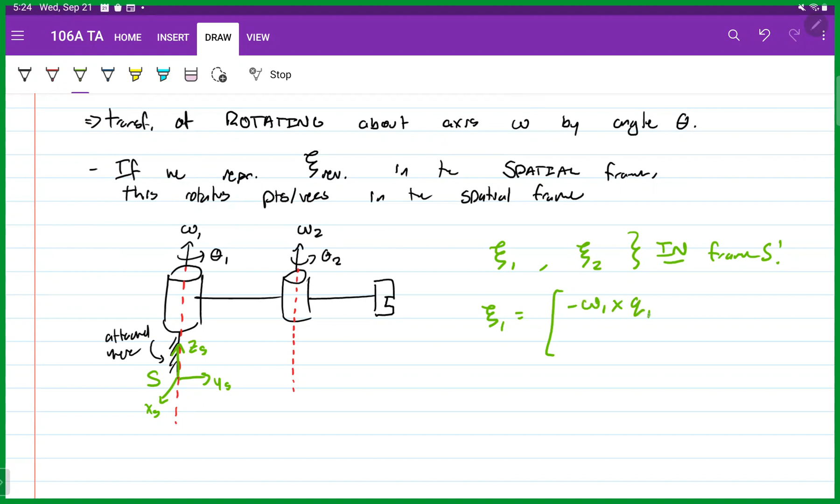Okay, so since these are revolute joints, we know that Xi1 will be negative omega 1 cross Q1 and omega 1. And Xi2 will be negative omega 2 cross Q2 and then omega 2. Okay, so what's important here is that we want these twists in the spatial frame, right? So what that means is that Q1 and Q2 are going to be in the spatial frame.

So if we take a look at our first axis, we know that this dotted line down here is tracing out where this axis goes in space. And we see it just goes right through the origin of frame S, okay? So for a really convenient point to choose, we could pick Q1 equals 0, 0, 0. But when we take a look at our second axis, which is this other dotted line over here, we see that it doesn't actually go through the origin, right?

Maybe the next most convenient point we could choose, like if this is length L1 over here, maybe we could choose a point like Q2 equals 0, L1, 0. But since this axis is shifted all the way over here in the spatial frame, we can't take this point as going through the origin. So it just depends on where our axis is located in space.

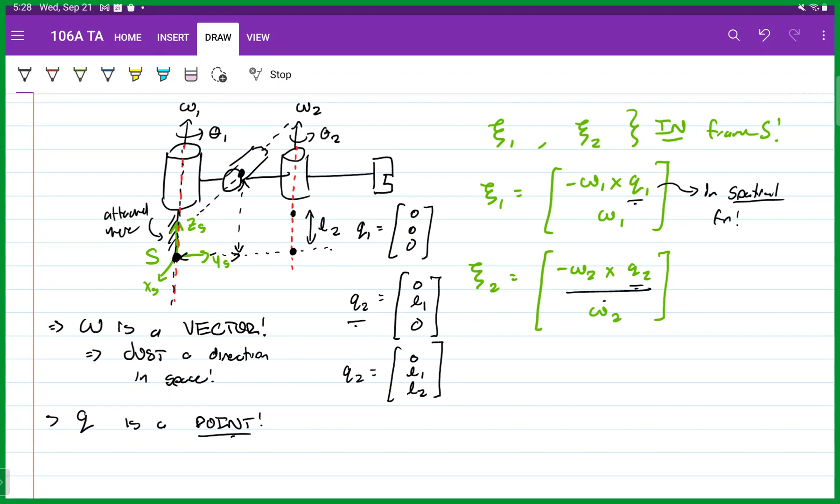In the homework, there was the spatial frame, and then there was a frame T. I personally didn't do anything with T. Okay. Yeah, so we're going to talk about what that T frame is a little bit later when we get to the forward kinematics section. But for now, we did quite a bit more in revolute joints than I was thinking we would do right now, which is good, which is why a lot of this extra stuff has popped up. But T will just refer to the frame that we have attached to this right here. So T is just the frame that's moving with the hand as we're going around. But we'll talk more about that a little bit later. Okay. All right, perfect. So that's our revolute joints.

So in summary, we say that for a revolute joint, we can find a twist in the form of negative omega cross q, omega, and this joint is going to be something that is purely rotating in space, right? So if we do e to the xi hat theta for this revolute twist, xi revolute hat, this is going to give us a transformation of rotation about this axis.

All right, so let's talk about the second type of joint, which is a prismatic joint. Whereas that first one was just a purely revolutional joint, right? It's just revolving around some axis. Prismatic joints are the logical next step. So a prismatic joint is going to be a purely translational joint.

Okay, so what does this look like? This might be a little bit weird to visualize at first, but say we have something like this. Put my drawing skills to the test here. Like that. And we have our hand on the end like that. All right. So let's say that this is actually able to move in and out of the cylinder over here, right? Like it moves forwards and it moves backwards.

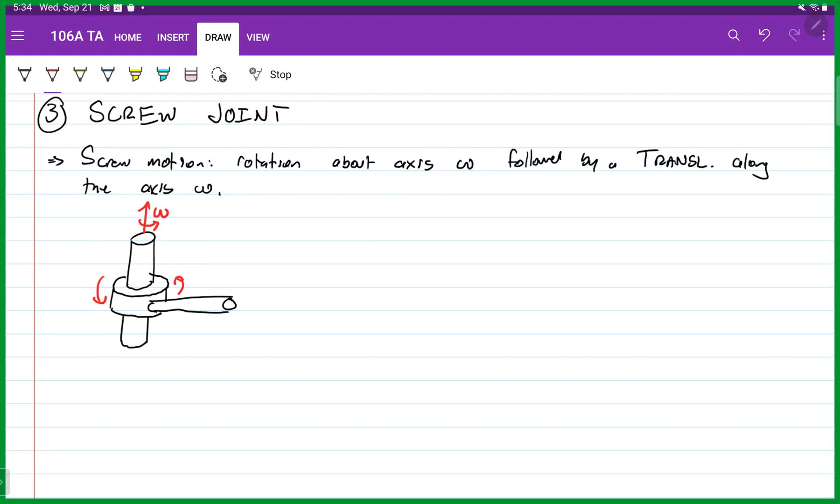All right. So what we're going to have is every time we rotate this joint about this axis, right? So say we're rotating it this way, about this rotational axis omega, we're not only going to be rotating about that axis, but we're also going to be translating along that axis. So you can visualize this like a screw, right? We have these little screw threads that are going up there and force this guy to move upwards if we're rotating this direction, or downwards if we rotate the opposite direction. Okay. So if we're rotating about this axis, say we might move up as well. So this entire thing will be moving.

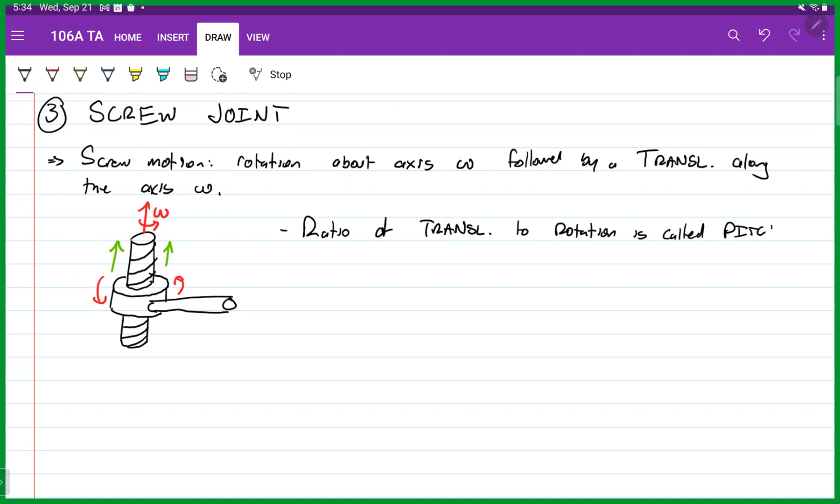Okay. And we have a special term for every sort of screw motion that relates the amount of translation to the amount of rotation. Right? So the ratio of translation to rotation is called pitch. Right? So we define the pitch of a screw to be the amount of distance we translate for the amount of angle that we rotate.

Okay. So say, for example, we rotate by an angle pi, but we only move 1 meter. What would our pitch be? Well, our pitch would just be 1 meter divided by pi, so 1 over pi. Okay.

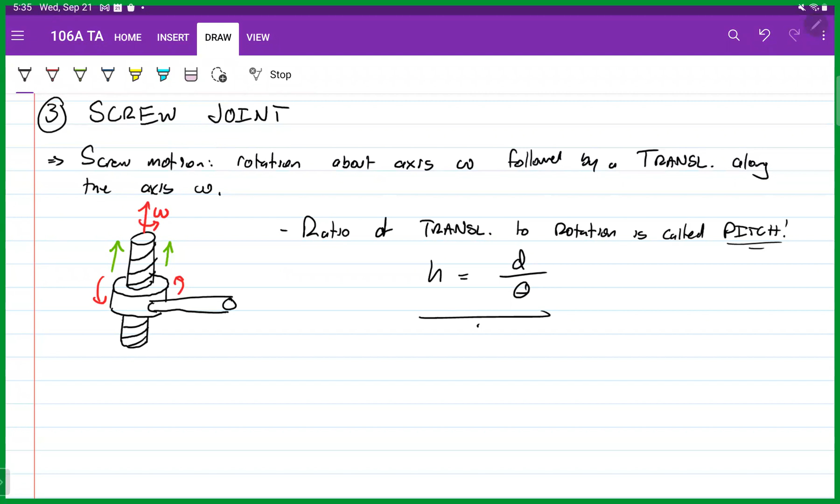So how do we describe the sort of twist that's associated with this motion? When we were talking about screws and twists and all this stuff, we ended up deriving this formula. It's called xi screw, and we said it was equal to negative omega cross q plus h times omega, where h is just that pitch that we just talked about. So that's going to be our velocity, and then on the bottom we just have omega.

So just as a review, term by term of what this means, let me just highlight these here. This is the translation along axis omega, because this h is converting whatever theta we multiply this twist by into some sort of translation by a distance of d along this axis. And this negative omega cross q is just the translation from the rotational motion.

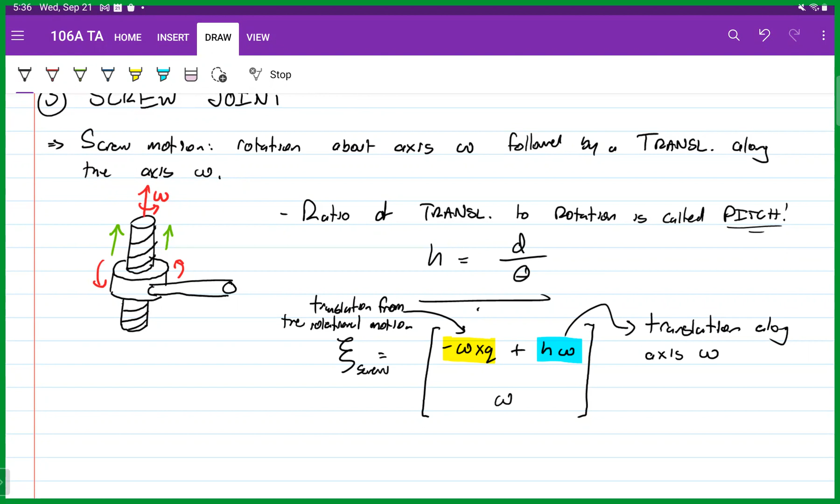You might recognize that negative omega cross q from the case of a purely revolute joint. It's just like if I start over here and I rotate my arm over here, that negative omega cross q will be taking care of that part. And this h omega will just be the amount that I move upwards along that axis. So do we have any questions about this screw?

I have a question, like for the first. Oh, sure. So I was thinking, theta is in terms of radians, right? So in this case, theta is in units of meters here. Yeah. So for the case of a prismatic joint, theta is just referring to the amount that we translate along the joint. Okay, sure.

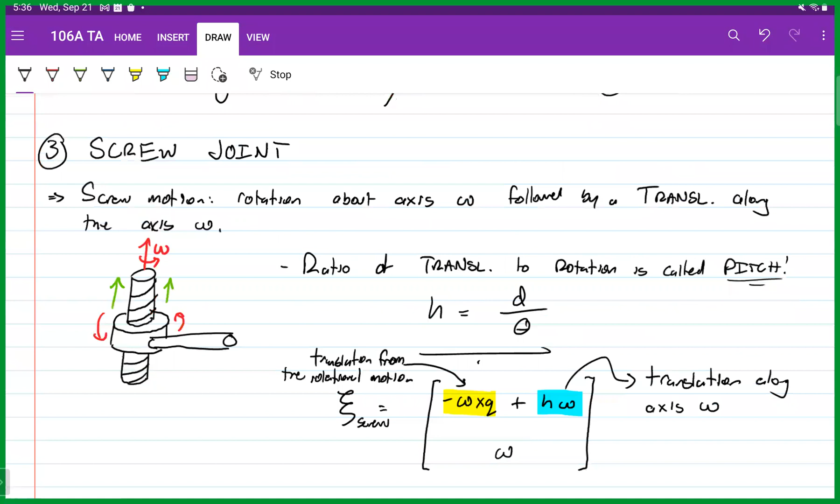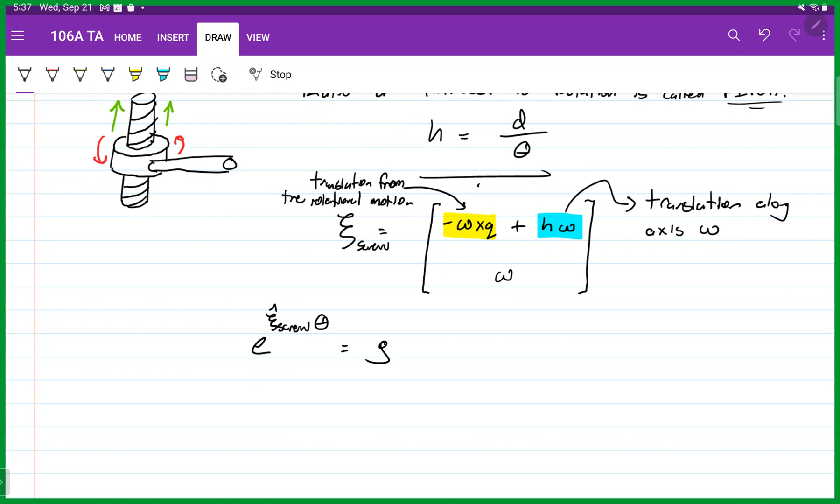So in this case, if we do a transformation of the form e to the xi hat screw times theta, and we get back some transformation g, what's this going to give us? Do we have translation from both of them? Yeah. So the first translation is like we're rotating about that axis. If I start my hand over here and I go over here, and then the second one is we translate along that axis like that. So it's just breaking it up into two parts.

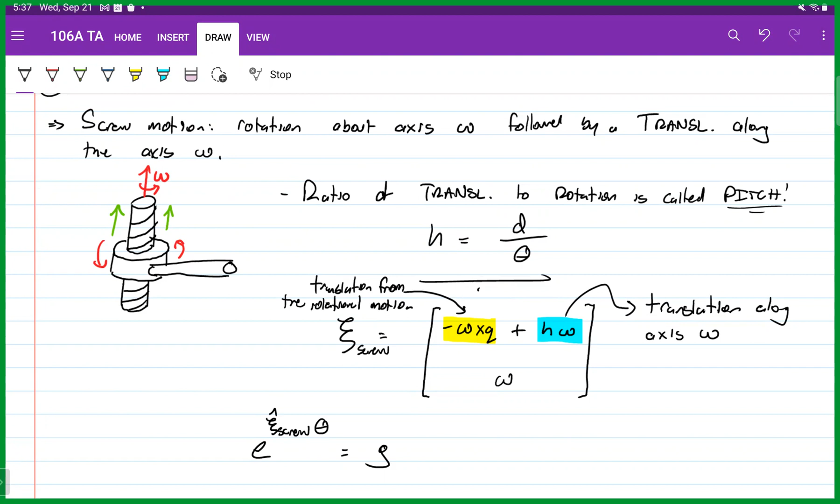So we have this g in SE(3), as always. So what does this give us? Well, first it gives us a rotation by angle theta along axis omega. And after that, it's going to give us a translation by the pitch times the angle that we move, because that just gives us the distance along axis omega.

All right, perfect. So that finishes up the main 3 types of robot joints. We have a revolute joint, which is what you have on the Sawyer robots downstairs, if you messed around with those during lab. We also have prismatic joints, which are just these pure translations back and forth. And finally, we have these screw joints, which are a combination of the two. So do we have any questions about these 3 fundamental joints for robots?

Can you think of a screw joint as like a combination of a revolute and prismatic? Yeah, absolutely. If you take a look at this screw joint, it's actually just the sum of a twist for a revolute and prismatic. So that's equal to xi revolute plus xi prismatic.

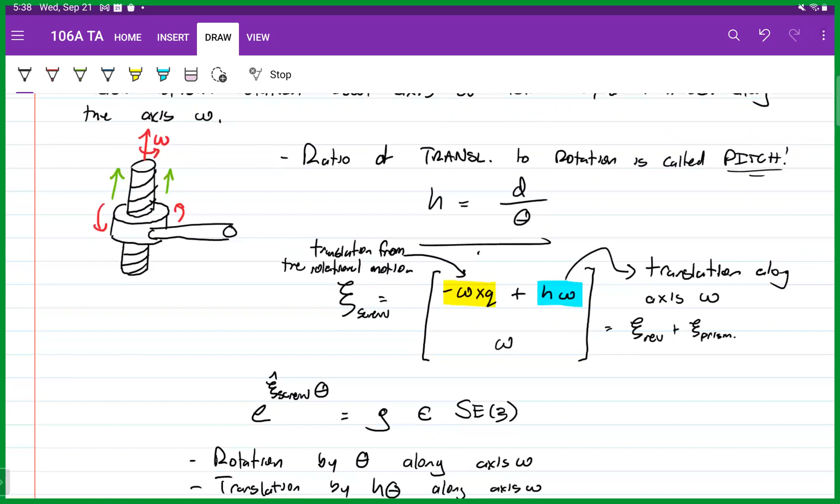What do you mean by translation by h theta along the axis omega? Is that the magnitude of the movement or something? Yeah. So whenever we rotate by an angle theta, the definition of the pitch for a screw is the ratio of the amount of translation that occurs versus the amount of rotation. So if we're rotating by theta, we're going to end up translating by some distance h times theta, because h equals d over theta. So when we multiply h times theta, that gives us d over theta times theta, which gives us the distance d that we translate.

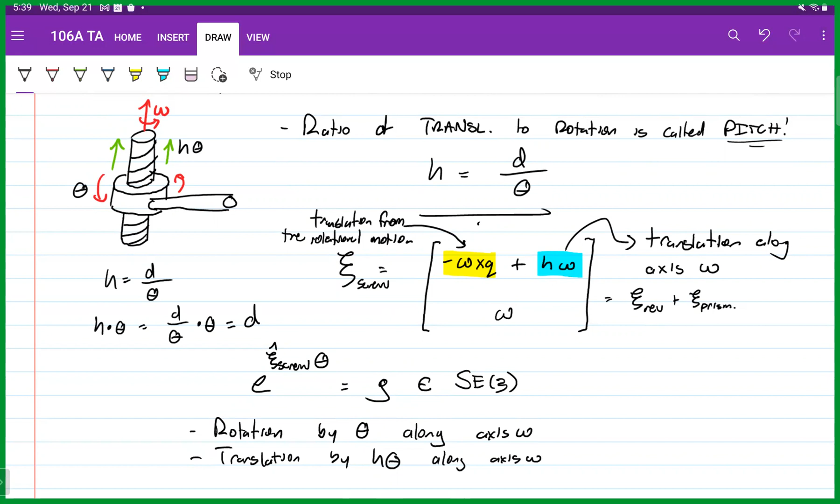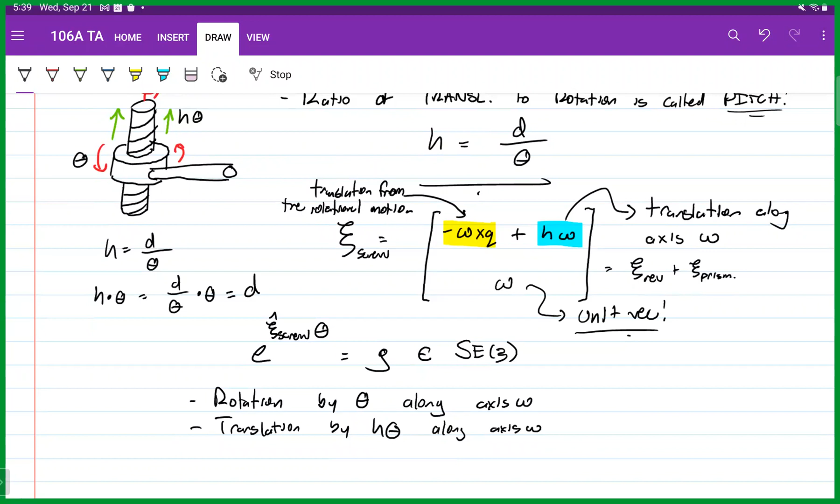So, let's see, was that all that I wanted to talk about? All right, cool. So let's talk about how this ties into the more general case of robot motion. Let's see how these might pop up in a practical problem that we're going to do. So say this is our first joint, this is our second joint of our robot arm, and then finally we end up with something like this all the way through.

Okay, so say that this is an axis of rotation, this is an axis of rotation, so like theta 1, or theta 2, and then finally we have theta 3 over here, okay? So if we take a look at this arm, what we find out is that this first joint is a rotational joint, okay? So it's revolute. The second joint, we're also just rotating about this axis, right? So this is also just revolute.

And this third joint over here is able to move up and down in this final location. Okay, so this is a prismatic joint. So we find that when we take a look at these more complex robot arms, we can really just break them down into these simpler joints that we know how to describe.

Okay, so we now know what the transformation associated with a revolute joint is. We know the transformation for a prismatic joint, so on and so forth. So if we're able to break our more complex robots down into these simpler joints, we already know the transformations for those joints, then we're already well on our way to figuring out these problems. Okay, so let me just write that down right here. You know the transformations for each. Okay, great.

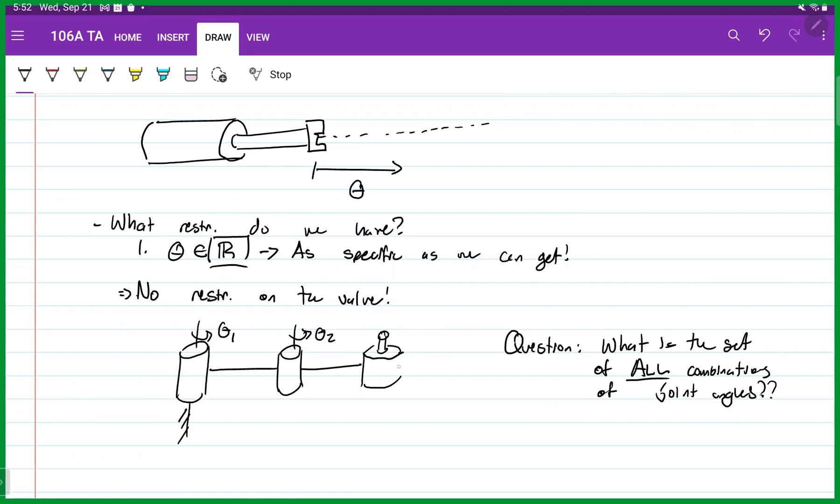Okay, so we already know that we're able to describe the set for each individual joint. Now we're just going to extend it to the whole thing. And just for the sake of this example, I'm going to change this last one over here to a prismatic joint, just so we see how that works. All right, so it's prismatic, and that's coming through there. That's able to move down. Okay.

So I'm going to write this out first, and then I'll come back and explain what I've written afterwards. We call the set of all joint combinations Q. And I'm going to write Q out as follows. So Q equals, for this robot arm above, S1 cross S1 cross R. So let me talk about what's going on here. We know that S1 will correspond to a revolute joint, right? This is going to have the set S1 describing all the possible values. It's going to have S1, and this is a prismatic joint over here, so that's going to be described by R.

Now, what this little cross does is it says, give me all of the combinations of these sets. So don't mix it up with a cross product. They use the same symbol for that. Oh, scroll. Sure. So they use the same symbol, but this is actually something called the Cartesian product. And if we take the Cartesian product of two sets, what that's going to give us back out is just the combination of all the values in those sets.

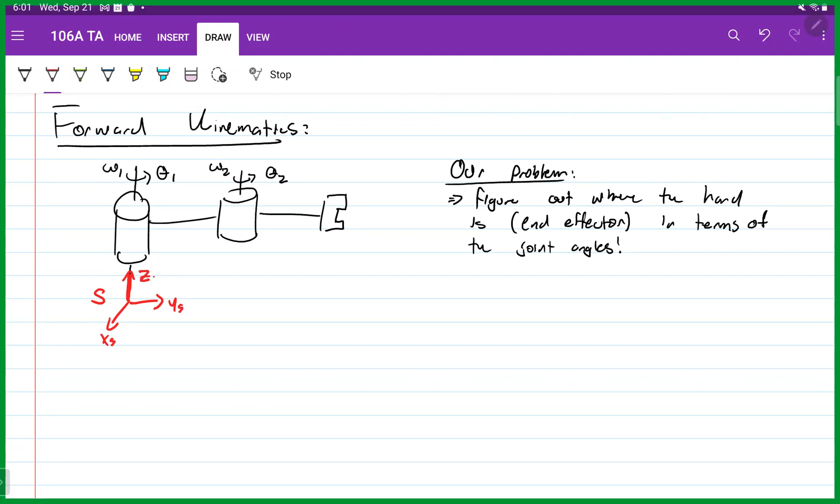So let's say that we have a frame over here that is completely frozen. It's fixed at the base of the robot. I'm going to call that the spatial frame S, like XS, YS, and ZS. So this is called the spatial frame, and it never moves. So when you're working in the lab with your robot, what might the spatial frame be? It could be either the base of your robot, or it could simply be your perspective. Maybe you're just sitting at your desk watching where the robot's going, the perspective of your eyes looking at the robot. That could be the spatial frame.

And in addition to the spatial frame, we also need to have something keeping track of where this end effector is. So we have this point, we have this other frame up here, and that's going to be called the tool frame, frame T. And we're going to have an XT, a YT, and a ZT. So this is the tool frame. And this is rigidly attached to the hand at a certain point, so it moves with the robot.

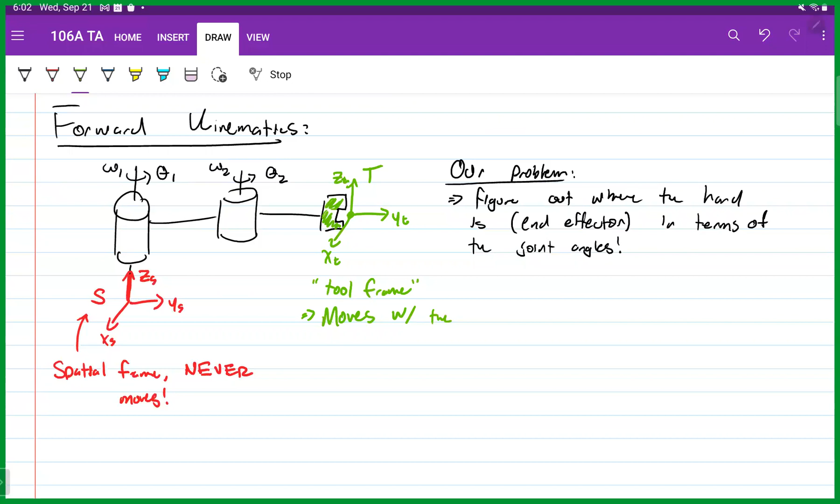When you say hand, you mean the end effector? That's right. You mean left hand or right? Oh, so when I say hand, I just mean this little guy over here, the little gripper at the end of the robot. All right. Cool. So it moves with the end effector.

So if I rotate it, say this is something that's marking out my frame, we see that this is just moving with my hand as it goes, but my actual shoulder is staying still. I could place a frame on my shoulder, that would be my spatial frame, and then I could place a frame on my little pen over here, and that would be the tool frame in this case.

So let's think about our problem right here. How can we keep track of the position and orientation of this tool frame with respect to the spatial frame? So how to keep track of the position and orientation of the tool frame with respect to, I'm just going to write WRT for that, the spatial frame.

So this is where all of our description of rigid body motion finally comes to light. We know that each link in this robot is going to be rigid. So each link is rigid. And when we move each link, we could describe that motion by a rigid body transformation. So link motion equals rigid body transformation. And we also know that we're able to compose rigid body transformations. I can compose a rotation of this part of my arm with this part and we get some total rotation. So we can also compose rotations, or compose rigid motions.